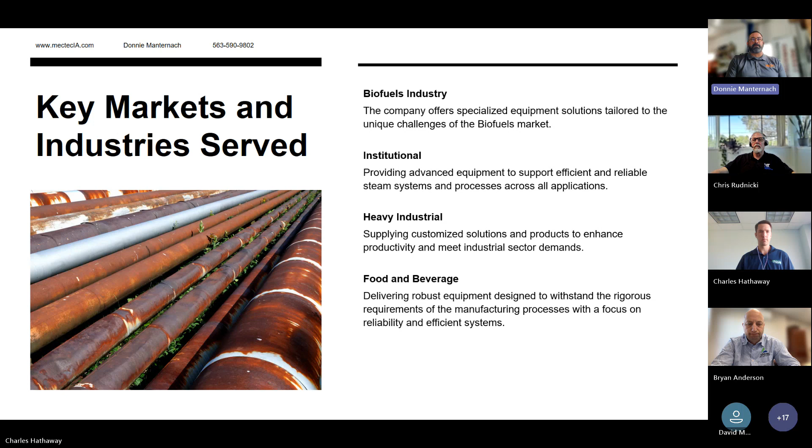I'll give you a quick overview of the product range that I offer with my customers, as well as some of the services. I service the biofuels industry, ethanol, biodiesel, institutional, which is hospitals and universities, heavy industrial, as well as the food and beverage industry, and have extensive experience in the processes related to those industries from the 15 years in the steam industry that I have.

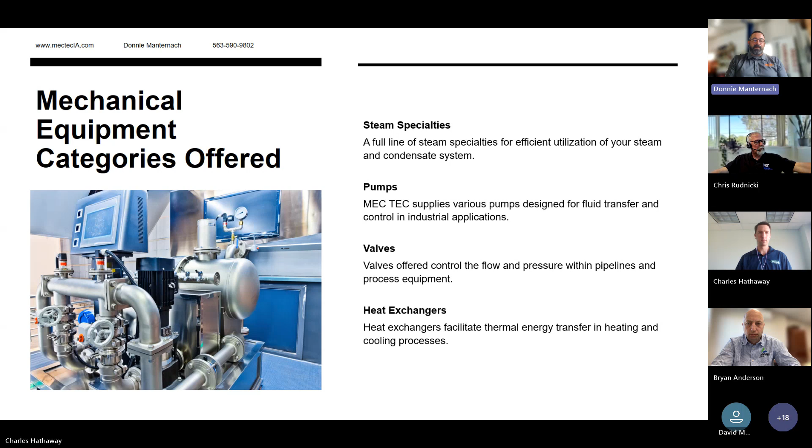The product and service capabilities as an organization: I offer engineered mechanical equipment ranging from steam specialties, which you'll hear very much about today, pumps from mechanical to positive displacement pumps, all ranges of valves from control valves, isolation valves, heat exchangers, as well as I do have an offering of steam trap services. So I can do steam system audits for your facility, steam trap surveys, as well as provide engineering and design support for any projects that you may have going on at your facility. And with the ultimate goal of providing your facility with a more robust, more reliable system that helps with your production and your processes moving forward.

And with that, I'll turn it over to Bryan, who's going to introduce us to Delta Steam Systems and the Venturi steam trap. Hey, thanks Donnie, very much. Excuse me, sorry.

Before we get started on that, can you talk about the best method for steam trap surveys and what goes into such a thing?

Over the last 15 years performing steam trap surveys, my preferred method is ultrasonic and temperature. The combination of those two results gives the best diagnosis of the current operation or condition of a steam trap in a system. Individually, one or the other gives you an indication, but it's hard to confirm true functionality of a steam trap without the combination of ultrasonic and temperature.

I know in the industry a lot of sites do try to do strictly thermal, and there can be some conflicts that arise from relying on just one technology or the other to truly deduce what the condition of a steam trap is.

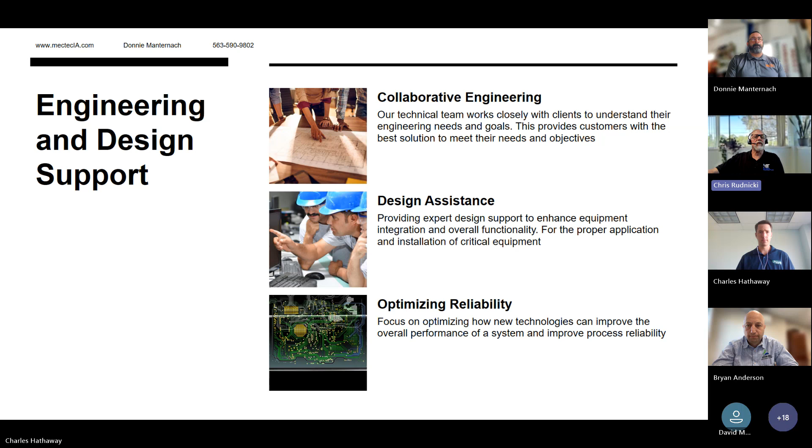Thank you, sorry Bryan. Yeah, no problem. Thanks very much. All right, let me get my presentation loaded up here.

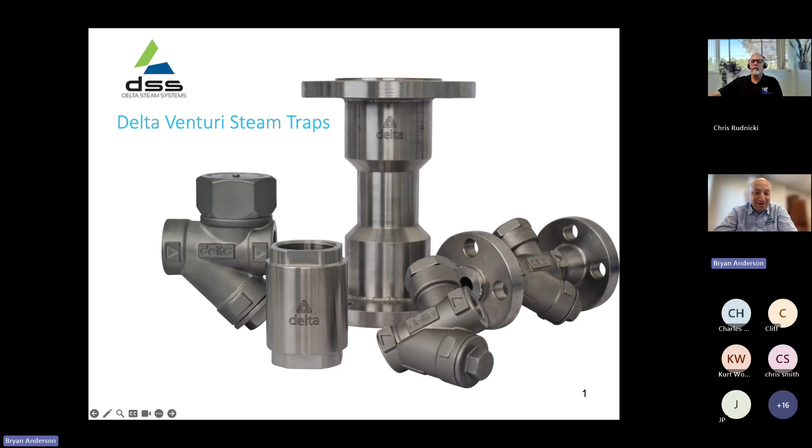So thanks everybody, nice to be here. It's 5 o'clock in South Africa. So let me just jump through our presentation a bit about who we are and what we do.

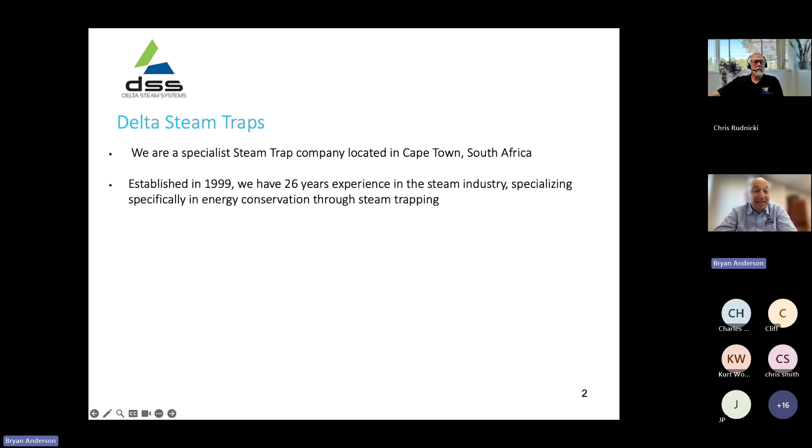We are steam specialists located in Cape Town, South Africa. We were established in 1999, so we've got 26 years in the steam industry, and we specialize in energy conservation through steam trapping. We're an ISO 9001:2015 company, and we're the designers and manufacturers of the 20-year guaranteed Delta Venturi steam trap.

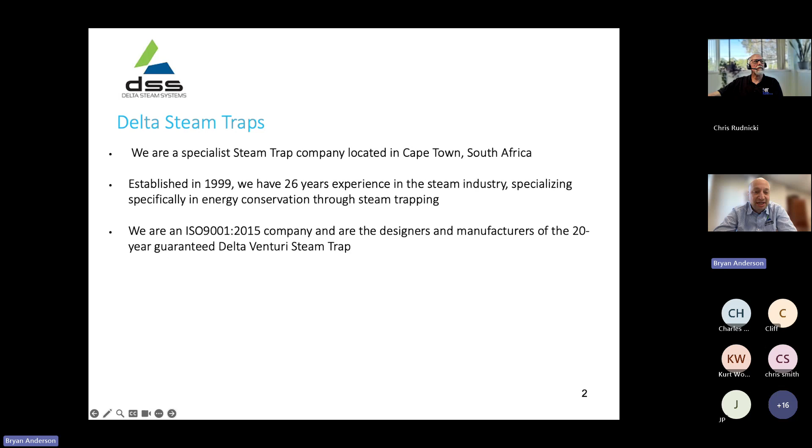Our head office is in Cape Town, South Africa, and our distribution network is spread across the world, with a sales network that extends even further. I'm going to briefly touch on some functions of steam traps and general steam trapping, and then jump into the Venturi steam traps themselves.

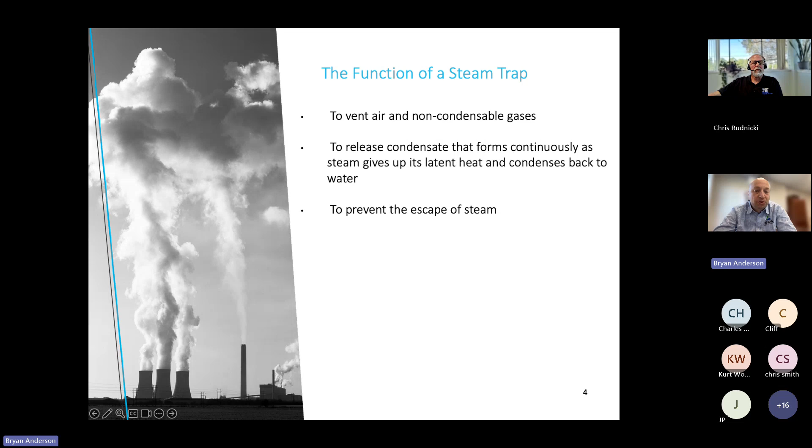The function of a steam trap is to vent air and non-condensable gases. It releases the condensate and gets rid of it as quickly as possible as it forms. Its job is to prevent the escape of steam, which is very important, and to operate reliably for long periods in harsh environments. Conventional steam traps open a valve when condensate or water is present, and close the valve when steam is present. The valve opens and closes continuously to drain the condensate and stop the steam from escaping.

In steam traps there are many moving parts such as ball floats, inverted buckets, bimetallic strips, bellows, and discs, and they cycle open and close continuously as they operate. As an example, a steam trap that cycles conservatively 5 times a minute is 300 times an hour, 7,200 times a day, and over 2.6 million times a year. This continuous cycling movement often results in steam trap failure, often within the first year.

Conventional steam traps are generally seen as consumables and need constant replacing, mainly through the cyclical movement of just wearing themselves out.

Steam trap failure happens in one of two ways: either fail closed, when the internal mechanisms are damaged, causing the steam trap to be partially or fully closed or blocked, or they fail open, where the mechanisms are damaged and the steam trap fails fully or partially open and leaks steam.

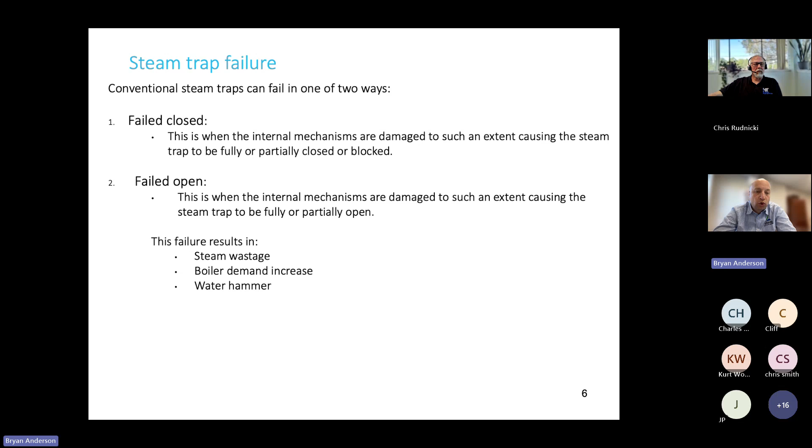Steam trap failure results in steam wastage, boiler demand increase, water hammer, cracked or damaged heat exchangers, valves, steam and condensate lines, additional boiler fuel usage, pressurization and slowing down of the condensate return system, poor heat transfer, decrease in production capacities, and carbonic corrosion resulting in leaking pipes.

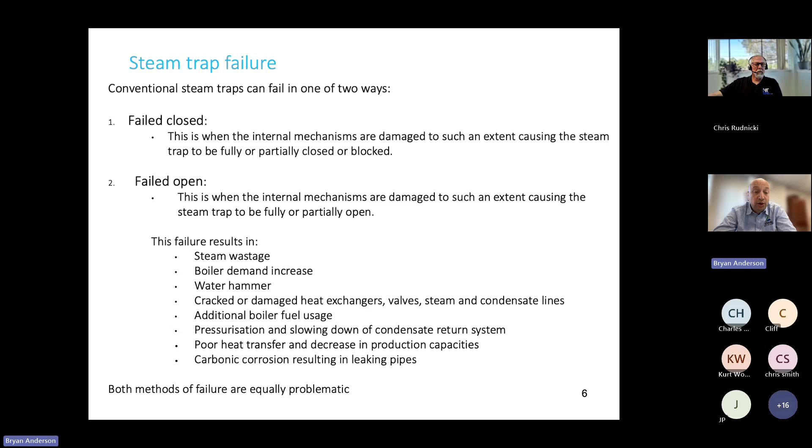Both methods of failure are equally problematic. A typical steam reticulation system is essentially a steam boiler with a main steam line to a steam header feeding the steam system. There'll be steam traps along the manifold, along the steam lines, getting to a heating unit or heat exchanger where the steam's been used, which will have a steam trap on it.

All of this condensate returns to the condensate return tank, which is pumped back to the boiler. Most plants are closed loop systems like this.

You do get drain to waste systems as well, but all along the system you'll have steam traps placed to get rid of that condensate and trap the steam back into the system and work efficiently.

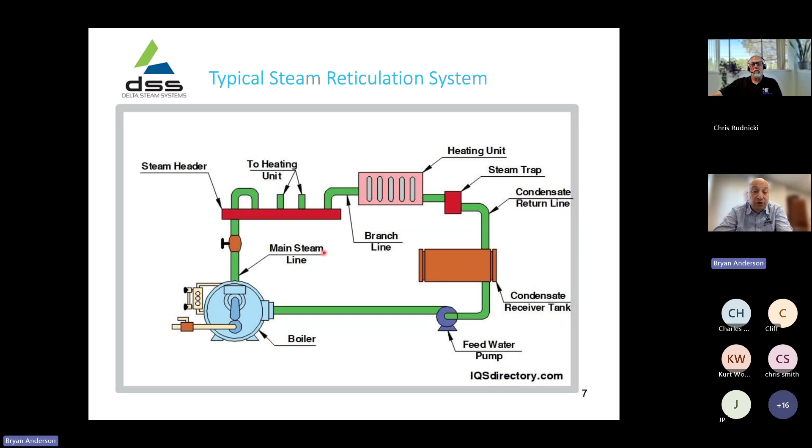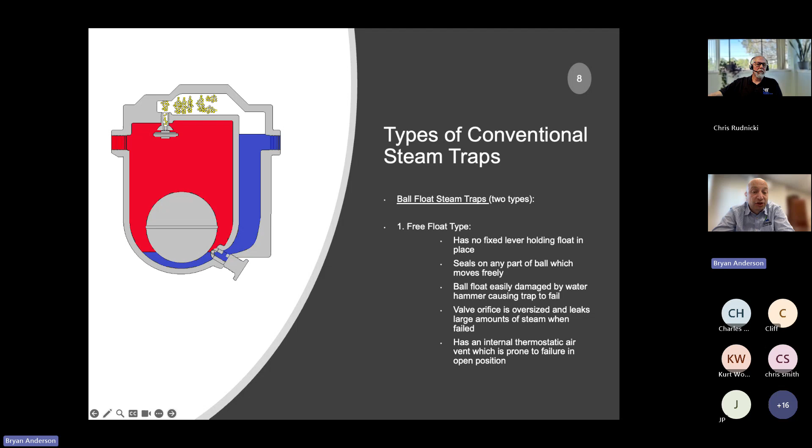So just quickly, some types of conventional steam traps. You get ball float steam traps. This is a free float steam trap where a ball moves up and down on a valve, which allows the condensate to leave. That valve is often oversized, so when the trap does leak, it leaks large amounts of steam.

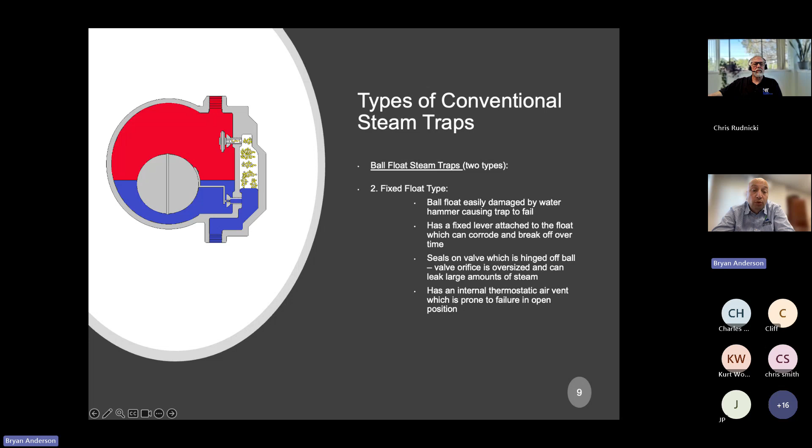You also get a ball float steam trap with a fixed arm that's fixed to the body of the trap, to the valve assembly, and that lifts and lets the condensate through. This also has an oversized orifice, so when it leaks, it leaks large amounts of steam. Generally these steam traps have built-in air vents, which can also leak steam.

The second type is inverted bucket type steam traps, which work on a system where there's a linkage with an arm, and that lifts and allows condensate to move. It's a part that moves up and down. This is the valve assembly, and as this bucket lifts up as the condensate fills it, that valve assembly will lift off the valve there and allow condensate to push through. This cycles open, close continuously.

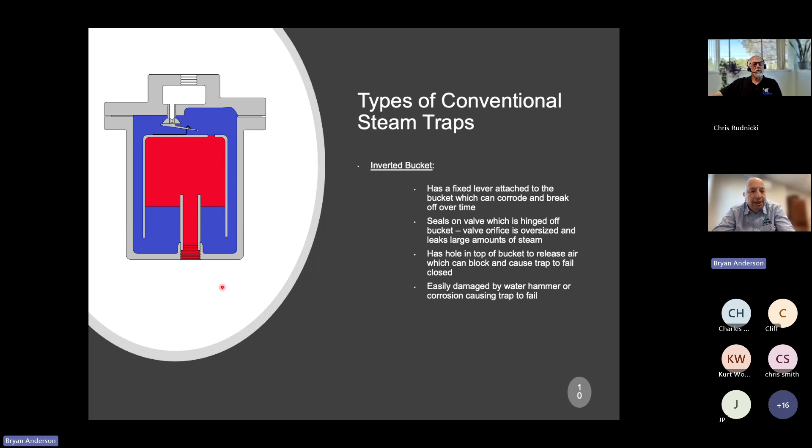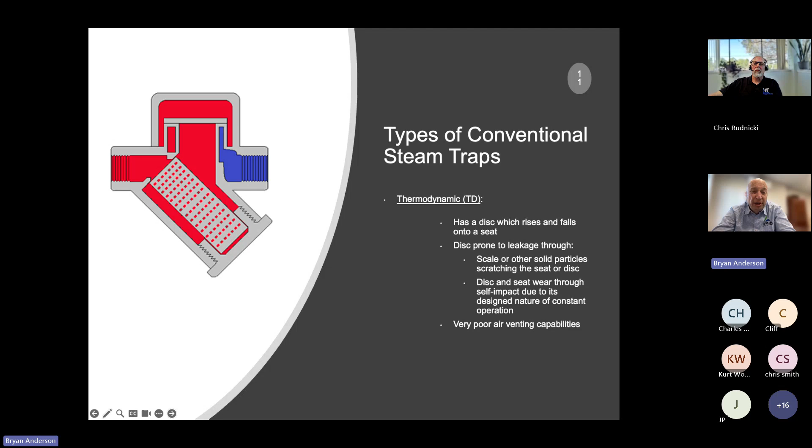Then the next one, probably the most common type of steam trap, is a thermodynamic steam trap, which operates with a disc that rises and falls on the seat. This disc is prone to leakage through either scale or solid particles scratching the seat or disc, or just through self-impact due to its design nature. As it opens and closes constantly, that self-impact creates wear and the traps tend to fail. Thermodynamic traps are probably the most common traps to fail on a steam reticulation system.

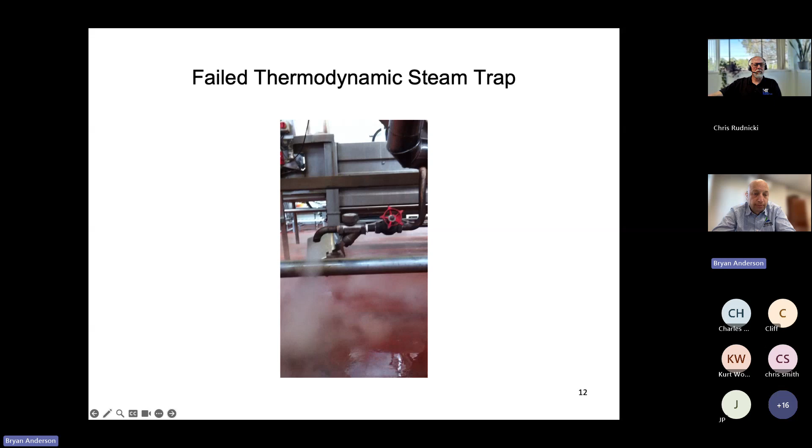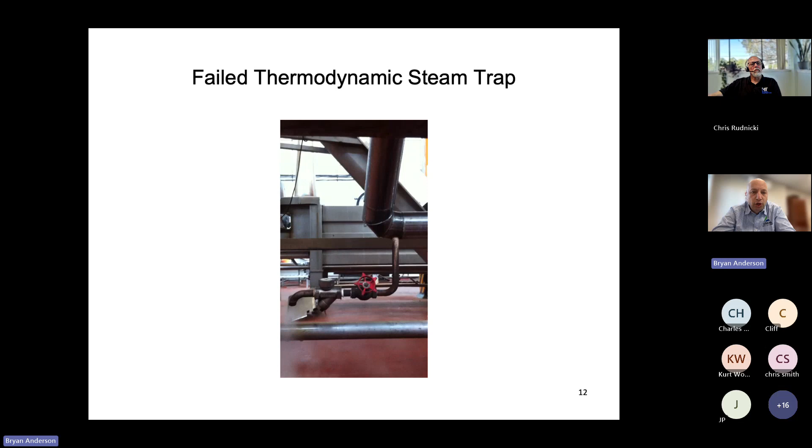So that trap is just wasting steam. It's supposed to close, wait for condensate to build up, and then pass the condensate, but this one's just passing steam constantly. We actually call it motorboating, the way it goes up and down, and that's normally piped back into your condensate return line, and it's not seen. So you don't see the waste, the leaking steam in front of you. It's piped back to your boiler system and often just vented out to atmosphere.

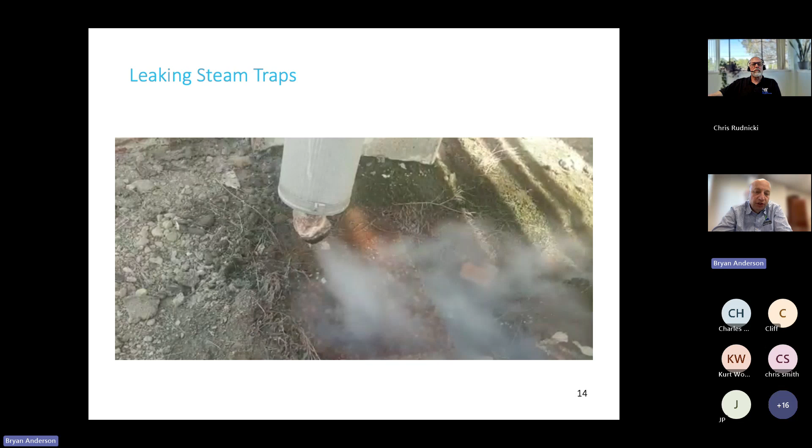And this is a video of a thermostatic steam trap on a condensate return system in a refinery that has failed. Again, that's just a visual that you can see. It's normally piped back to your return system, so you don't even notice that that's happening. You walk past the steam trap and it all looks good and you think the trap's working well, but meanwhile it's blowing steam back into the steam condensate return system, and it's costing loads of dollars.

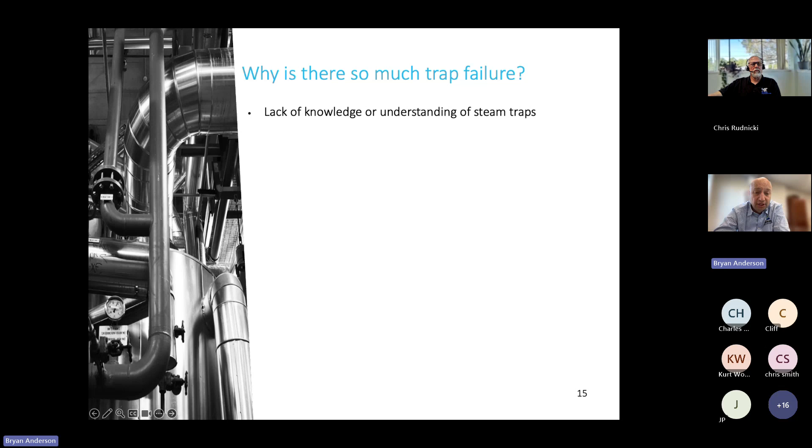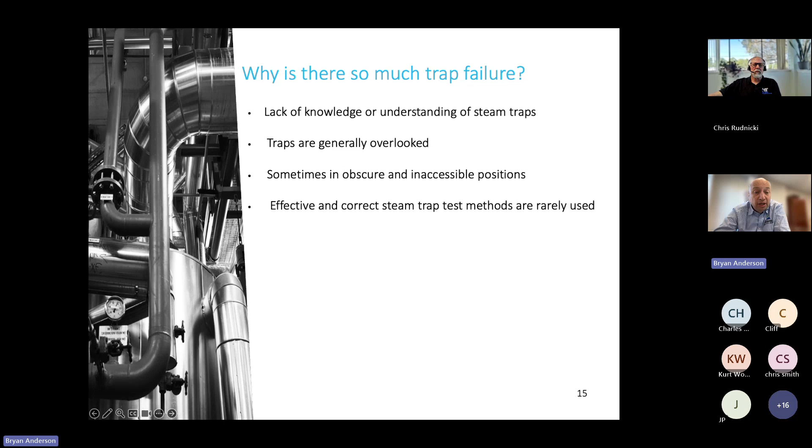Then why is there so much steam trap failure? Often there's a lack of knowledge or understanding of steam traps. It's just a valve that's in the system, and nobody really knows how to test it or what to do about it. They're often just generally overlooked. Sometimes they're in an obscure or inaccessible position, so they can't be reached to be tested properly. Or effective and correct steam trap test methods aren't used to test the trap properly.

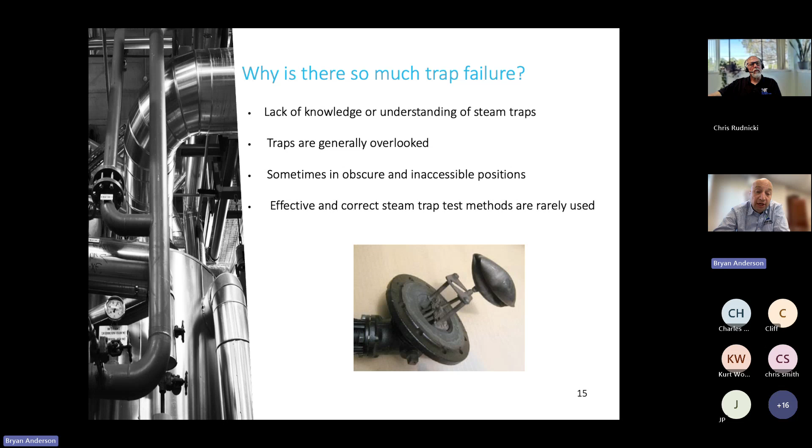This photo just shows a picture of an F&T trap, the ball that's used to modulate the valve assembly that's been damaged by water hammer. So when this happens, this valve would fail in the closed position, and that steam trap would not pass any condensate out. So it's easily damaged by water hammer and then fails closed.

So results of steam trap failure are process problems where there's frequent downtime, pressure surges, or slow startup, and distribution problems with steam loss, water hammer, or poor steam quality.

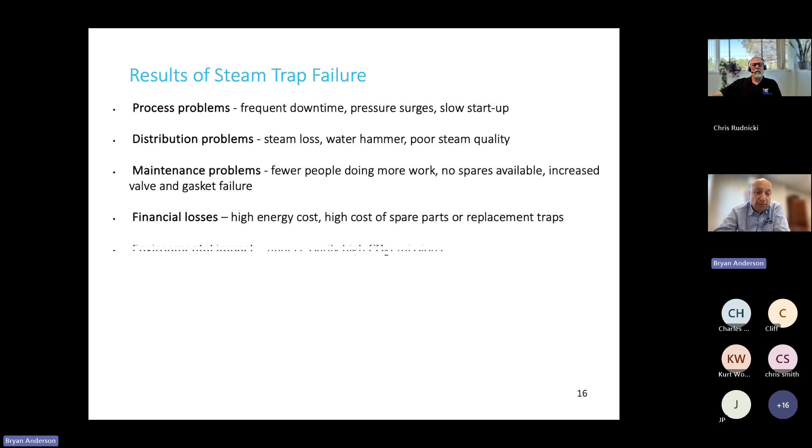There's maintenance problems where there's fewer people doing more work or there's no spare parts available. And then financial losses, there's a high energy cost, high cost of spare parts or replacement traps. The environmental impact where there's unnecessarily high CO2 emissions through failed steam traps.

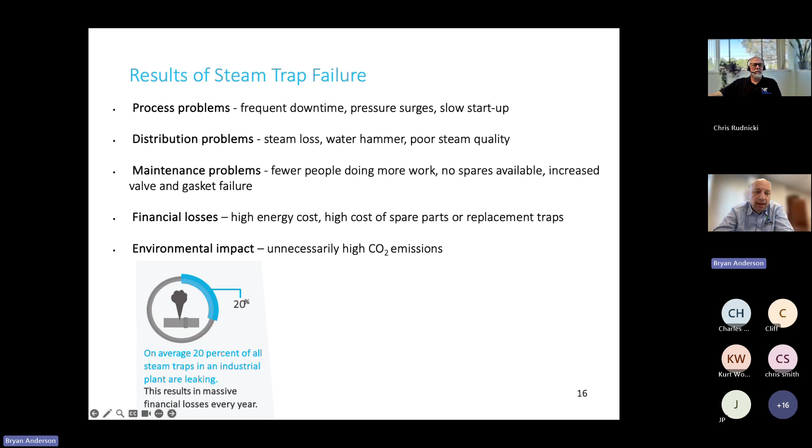On average, 20% of all steam traps in an industrial plant are leaking, which results in large financial losses every year. We've done numerous steam trap audits around the world, and that 20% is a figure we see quite regularly. We see less and more, so depending on the regularity of your steam trap testing program, you can bring that down a bit if you test your traps more often. But generally, it's 20% failure of the steam trap population on a plant.

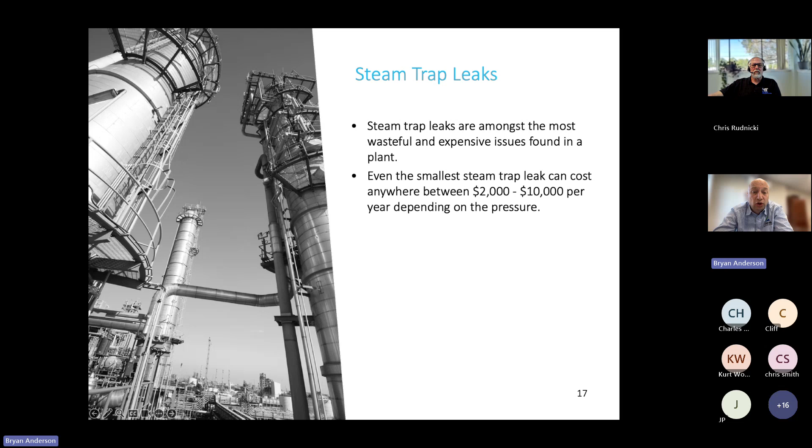So steam trap leaks are amongst the most wasteful and expensive issues found in a plant. Even the smallest steam trap leak can cost anywhere between $2,000 and $10,000 per year, depending on the pressure in the system.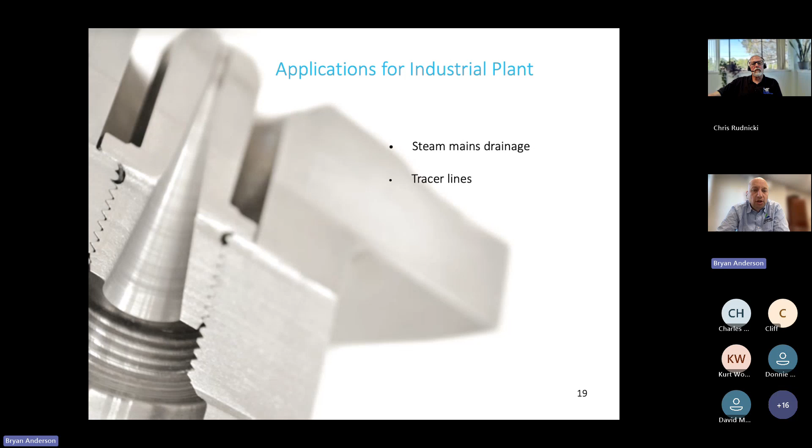And then just some applications for industrial plants, I think I just touched on it now. So steam mains drainage, drip legs, tracer line applications, and process applications, heat exchangers. That's what I was saying a bit earlier.

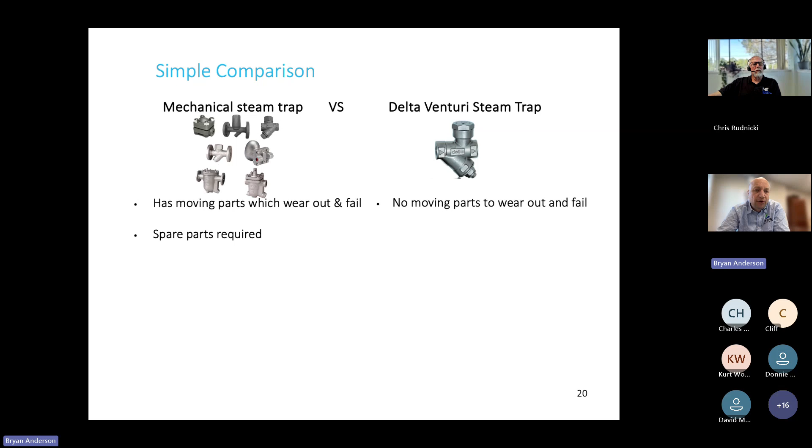So a simple comparison between conventional steam traps and Venturi steam traps. Conventional steam traps have moving parts which wear out. We touched on that earlier. Because of the way they cycle and constantly are opening and closing, they eventually fail and wear out. Whereas there's no moving parts on a Venturi trap that fails and wears out. They require spare parts, conventional traps, where Venturi traps don't require spare parts.

Conventional traps have poor resistance to wear and water hammer. A Venturi trap easily handles water hammer.

Conventional traps generally come with a 1-year guarantee or warranty. With the Venturi trap, it's 20 years.

Expected lifespan of a conventional trap is 1 to 3 years on average, some may last a bit longer. The expected lifespan of a Venturi trap is 20 to 30 years, so it'll outlive most of the pipework in that system.

Conventional traps can fail open and waste steam. With a Venturi trap, a correctly sized Venturi trap cannot fail open and waste steam.

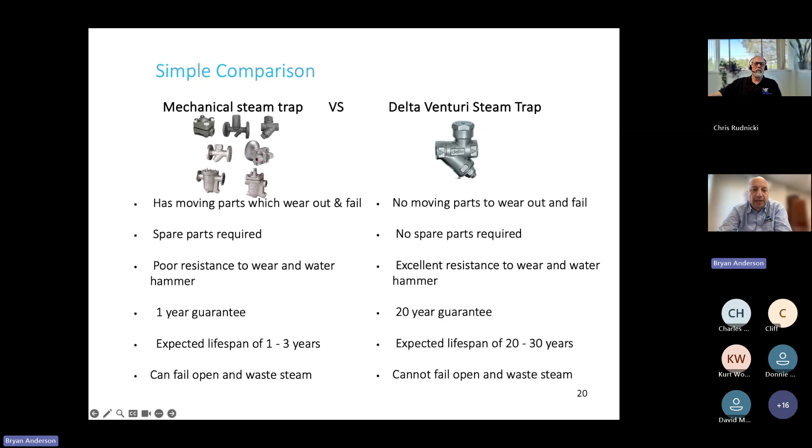The Delta DSV, which is the model I've been showing you, is the world's first dual strainer Venturi steam trap, with complete 316 investment casting construction.

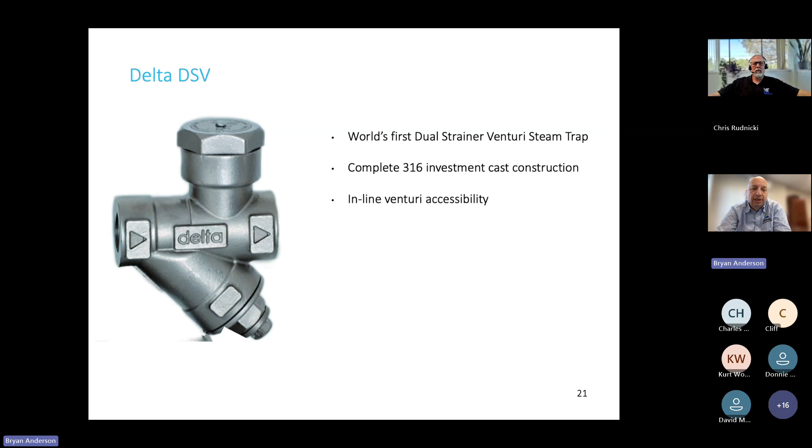It's got inline Venturi accessibility, so the trap itself is installed, and if you need to access the Venturi nozzle, if for whatever reason the system changes, the pressure is adjusted, and you want to change the nozzle, it's quite simple to do that. While it's inline, you don't have to remove it from the line.

Here's an exploded view of the trap itself. This is just the flanged version, but you can see the Venturi nozzle that gets fitted into the body of the trap, and over that goes the secondary strainer. From the bottom is the primary strainer with the caps and the gaskets that belong to it.

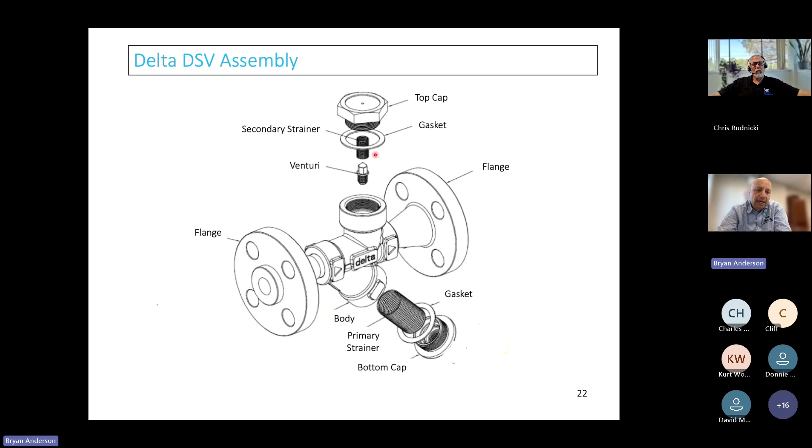So the flow through the trap: in the inlet through the primary strainer, through the inlet port, then the secondary strainer, and then into the tunnel orifice of the Venturi.

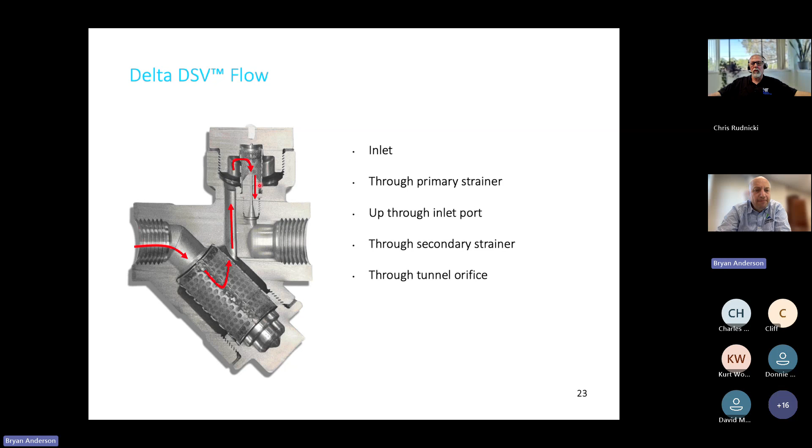Now the tunnel orifice is the elongated orifice of the Venturi trap, and why that's very important is that it's quite long to prevent wire draw. If it was a very short orifice, there would be a potential of wire draw and widening, but because we make it so long, we have no issue with wire draw. The orifice doesn't widen, and that helps give the extended warranty on these traps.

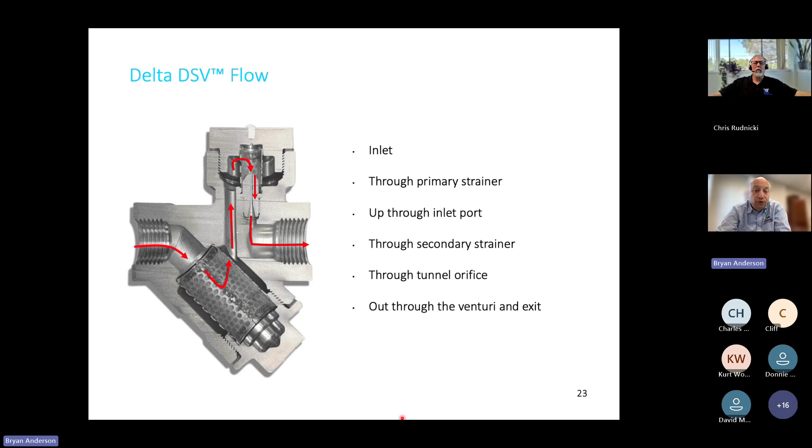And then obviously out through the Venturi and exits into the condensate return system.

I'm going to show you a quick video of the workings of the trap, and it'll give a bit of an explanation.

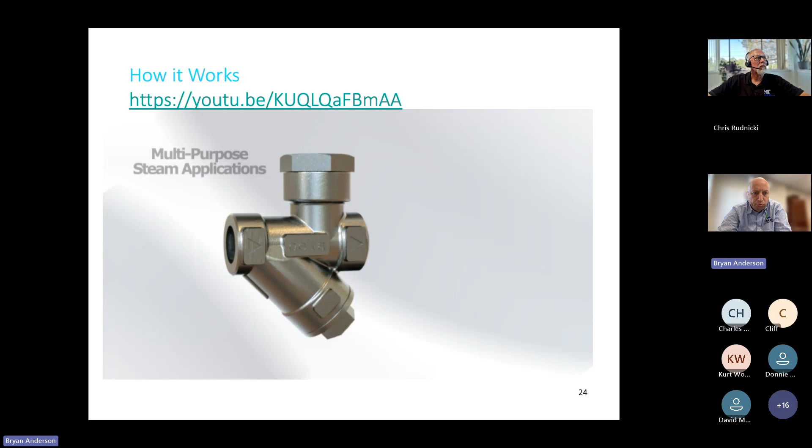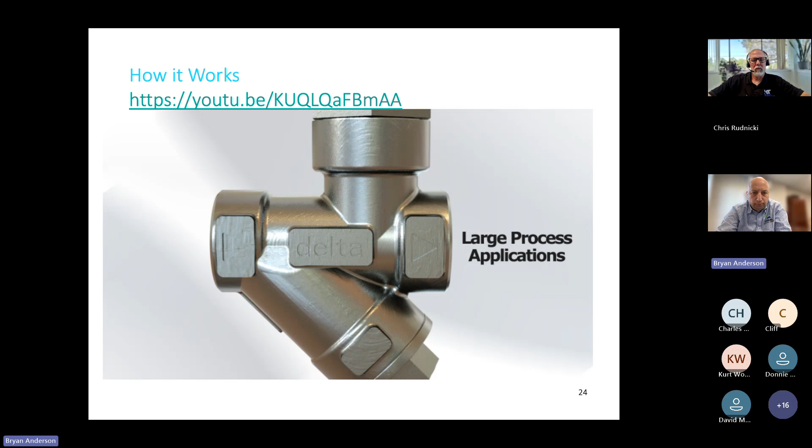Introducing the Delta Venturi Orifice Steam Trap, a unique steam trapping solution designed for multi-purpose steam trapping applications, from line drainage and trace heating through to medium and large process applications. Unlike conventional mechanical-type steam traps, Delta Venturi Orifice steam traps have no moving parts that can break or get damaged, and are still able to outperform conventional steam traps in lifespan and energy efficiency. The Delta range of steam traps have a lifespan in excess of 20 to 30 years, far outperforming any mechanical steam trap by many years.

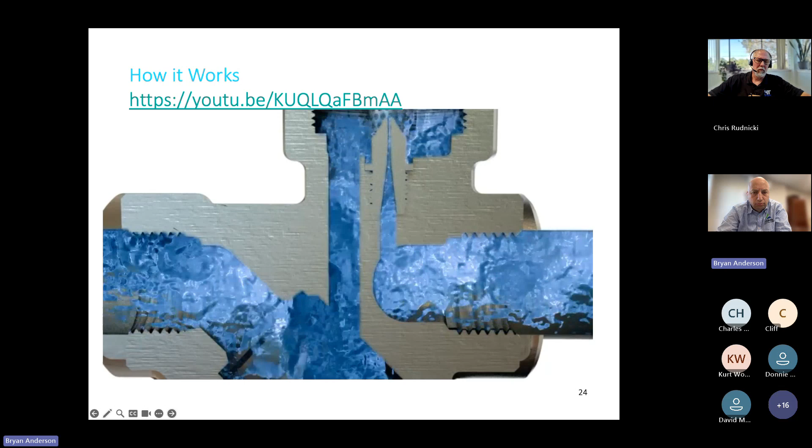At startup, the water is at very low pressure and temperature, so no flashing occurs as it exits the Venturi. This means there is no back pressure present to restrict the flow of cold condensate as it exits the Delta trap. This cold water exits freely at 2 to 3 times faster than hot pressurized condensate can at running load. This absence of flash steam on startup is why Delta Venturi orifice steam traps are suitable for startup loads.

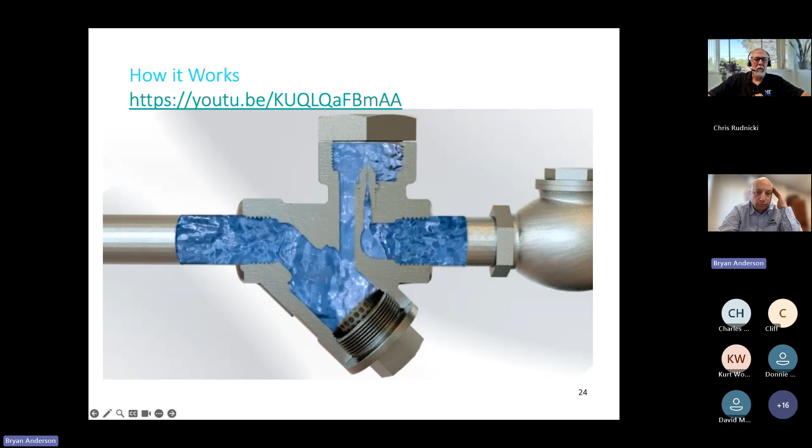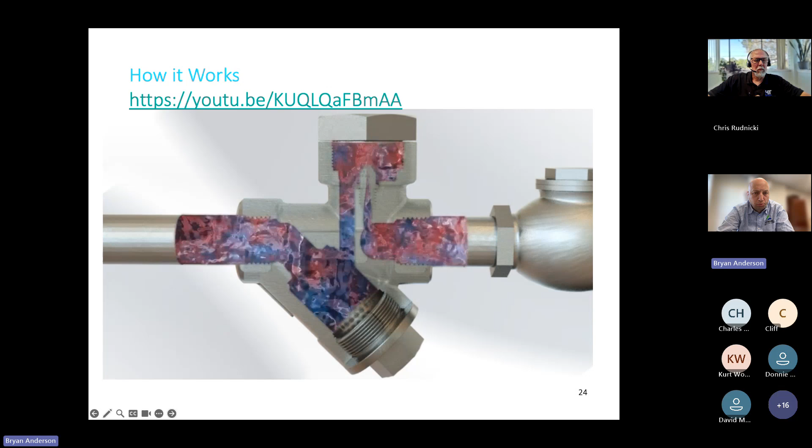Once all the cold condensate and non-condensable gases have been ejected, steam and hot condensate reach the Delta steam trap. As the steam continuously condenses to hot condensate in the pressurized steam system, it is fed to the steam trap by the pressure in the system. This hot condensate passes through the orifice and enters the mouth of the Venturi.

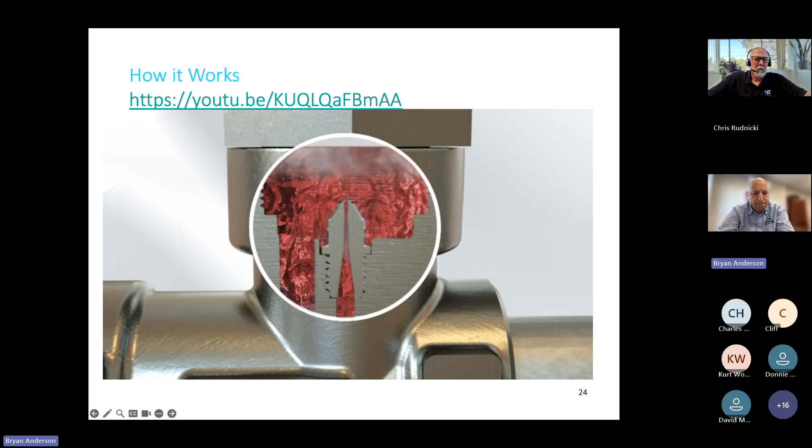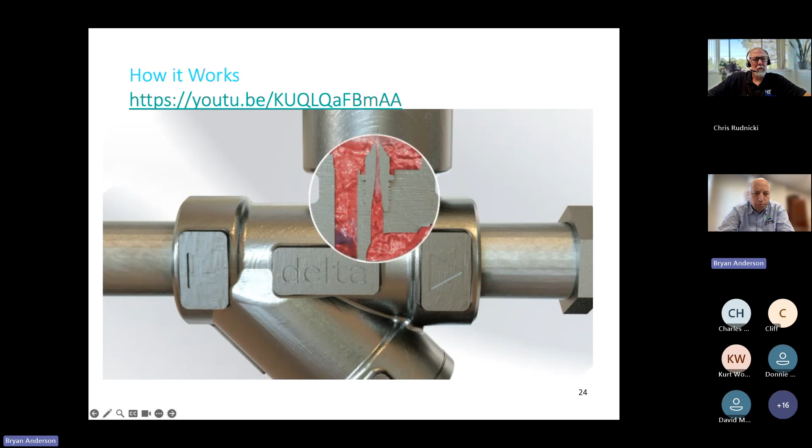As the condensate passes through the mouth of the Venturi, there is a sudden pressure drop, which causes a percentage of the hot condensate to change phase from condensate to steam, a phenomenon known as flashing. This flashing creates a back pressure zone in the mouth of the Venturi. Because condensate is 1,000 times denser than steam, it is able to push through this back pressure zone while restricting the steam. As the pressure and load in the steam system vary, so too does the percentage of flash steam being created at the mouth of the Venturi in the Delta steam trap, which in turn allows the back pressure at the Venturi to vary accordingly.

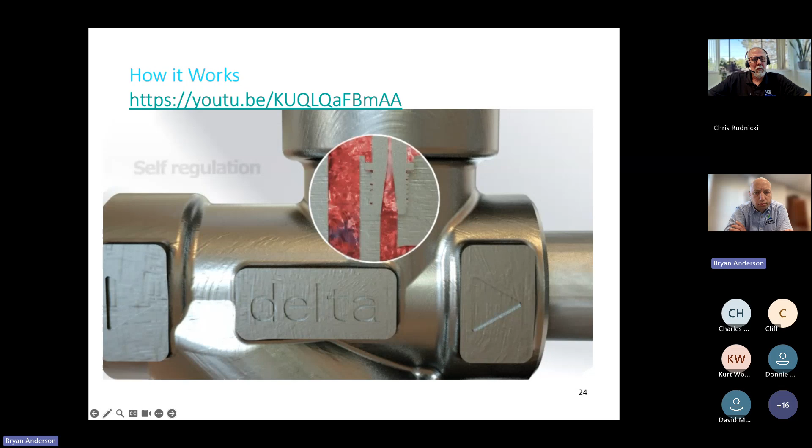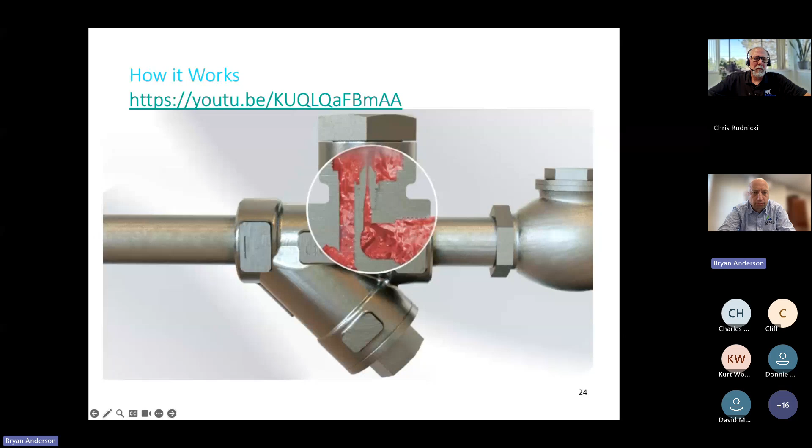This varying of back pressure at the mouth of the Venturi allows the Delta steam trap to self-regulate the condensate flow as the condensate load changes. As the pressure or load in the steam system rises or falls, the back pressure that is constantly changing at the mouth of the Venturi also rises or falls. This action gives the Delta Venturi orifice steam trap the ability to easily manage discharging varying condensate loads in a steam trap that has no moving parts, while still keeping the steam in the system.

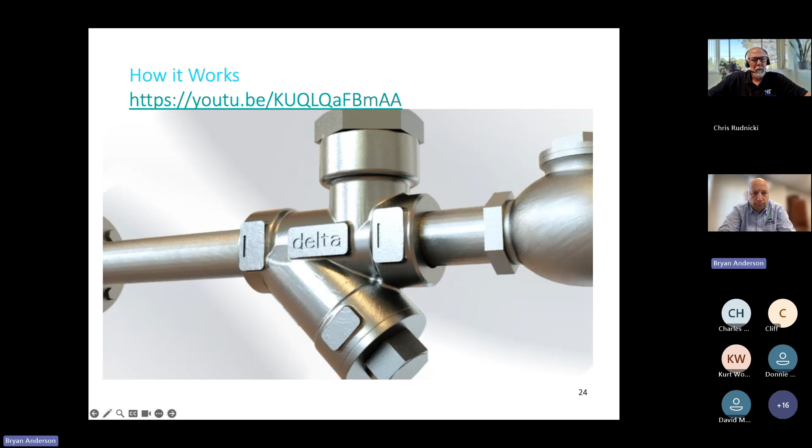In summary, Delta Venturi orifice steam traps are designed to outperform all conventional steam traps through their unique Venturi design with no moving parts at all. Once installed, the Delta Venturi orifice steam trap will outlast and outperform any other mechanical steam trap in the same application.

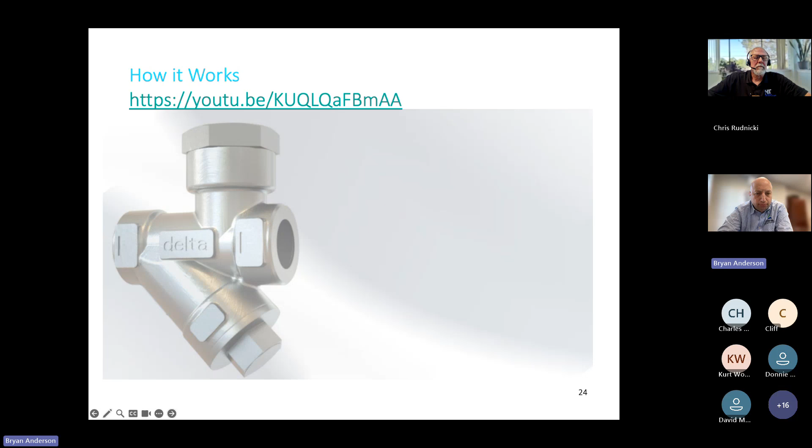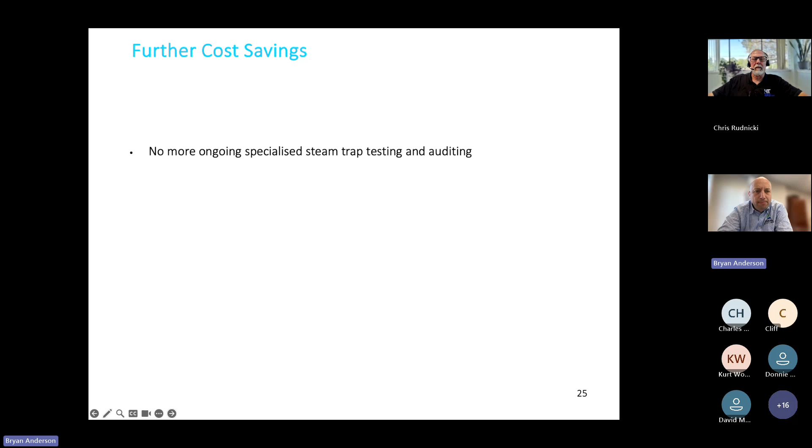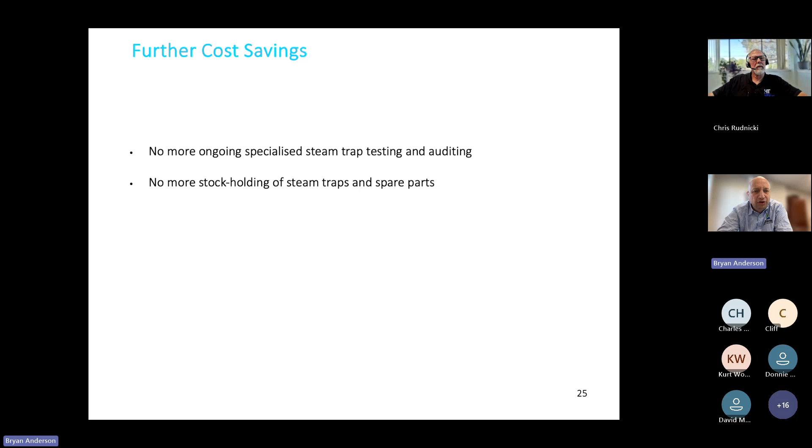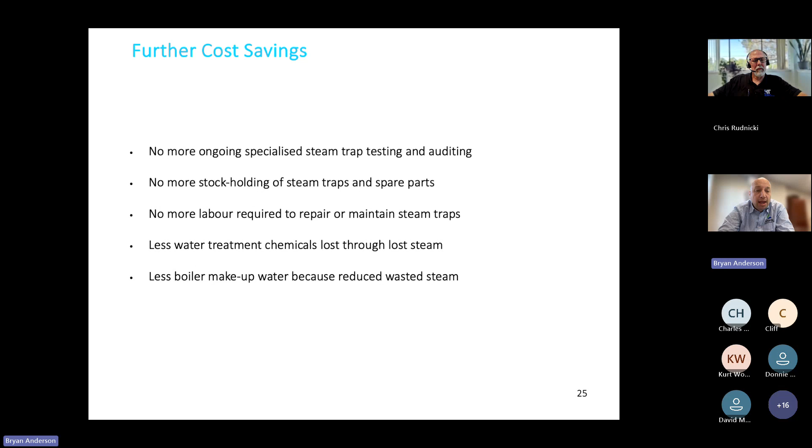So just touching on some further cost savings. Once you've installed Venturi steam traps and they're tested, commissioned, and working properly, there's no more ongoing specialized steam trap testing and auditing needed. It's because the trap is working and we guarantee it for as long as we do. You should never need to do any excessive steam trap testing and auditing. There's no more stock holding of steam traps and spare parts because you're not constantly replacing traps anymore. The labor is reduced for repairing or maintaining those steam traps. Less water treatment chemicals are lost through the savings on lost steam, and less boiler makeup water is needed because of the reduced wasted steam.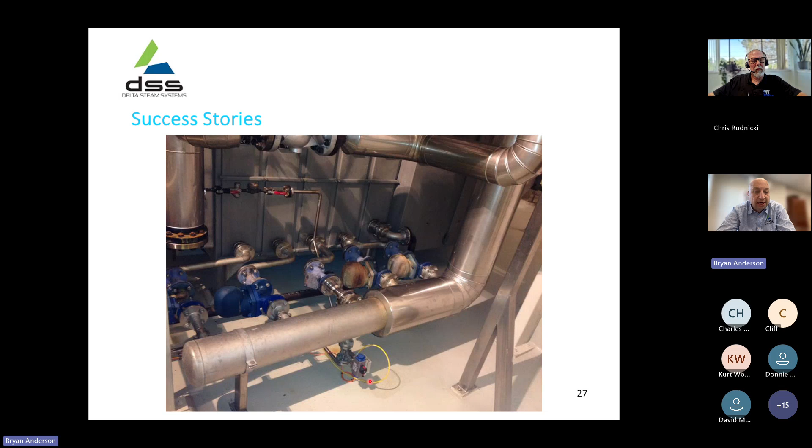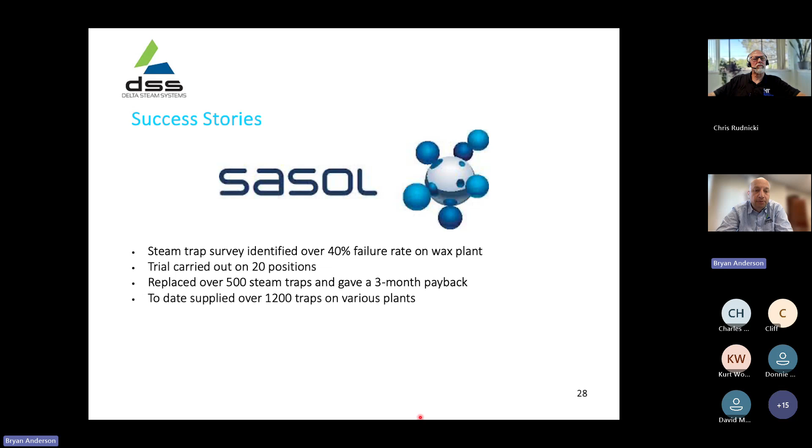And then another story was Sasol, which is a very large multinational petrochemical plant. A steam trap survey identified 40% failure across the total wax plant. They did a trial of about 20 traps, 20 positions, and replaced over 500 steam traps with a 3-month payback for that specific plant. To date, we've supplied over 1,200 traps across various Sasol plants around the country.

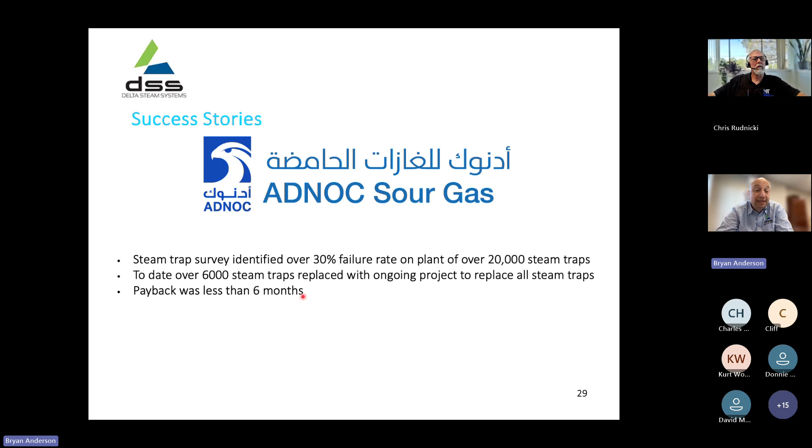And then ADNOC Sour Gas - ADNOC is the largest gas producer in the world, located in Abu Dhabi. They had a 30% failure rate on their plant of over 20,000 steam traps, so that's a massive failure rate. We weren't involved in the survey, we just saw the results and this is what was given to us. To date, we've supplied over 6,000 steam traps with an ongoing project to replace their steam traps. We've just received 2 orders from them for another 1,200 steam traps, so this is an ongoing project to replace all their plant steam traps with Venturi steam traps. The payback of the traps supplied to date was less than 6 months.

And then Bryan? Yeah, Chris, can you talk about the ROI and what is that typical 3 to 6 month payback? Yeah, so on failed steam traps, generally the ROI is less than a year, depending on the pressure and the steam costs, but often we do see returns of less than 3 months.

If it's on just the failed traps, it's generally 3 to 6 months, but sometimes just over 6 months. If it's on complete plants, where you take all the failed traps plus some of the working traps, you tend to get a return of about 1 to 2 years. They do that to eliminate the need to continuously replace traps, so they replace the whole plant. 3 to 6 months is what we see most often, but it can get up to a year, and then on complete plants, 1 to 2 years.

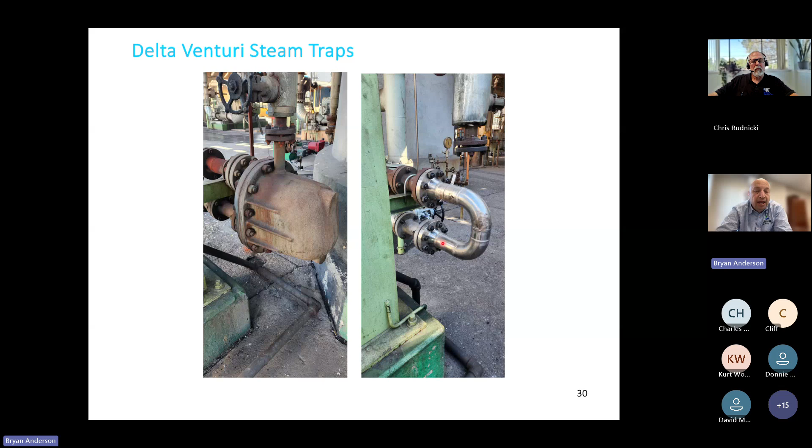Just some photographs of some traps that were replaced. These are large process traps. This was a very large, I think a TLV float trap on a very large heating column. We replaced that and made a special design modification for their pipework so it would fit. The Venturi nozzle itself is inside this body, and this was done on a very large petrochemical plant. There's a couple of traps that were replaced.

These are just from different sites around the world. Some thermodynamic steam traps that were replaced. This is a video of one of our traps working on a plant. Let me just get this set up, there we go.

What we're trying to show here is, it's often said Venturi traps just leak steam because they're just an orifice and can't hold condensate back. What can be seen clearly here is on the outlet of this pipe, which is vented to atmosphere, you'll see drips of condensate and just flash steam escaping. Now, flash steam isn't leaking steam, it's normal, it's just the steam coming off the hot condensate as it goes from a higher to a lower pressure. If it was leaking steam, you'd see pressure behind it, blowing down into the ground. So this trap is working very well.

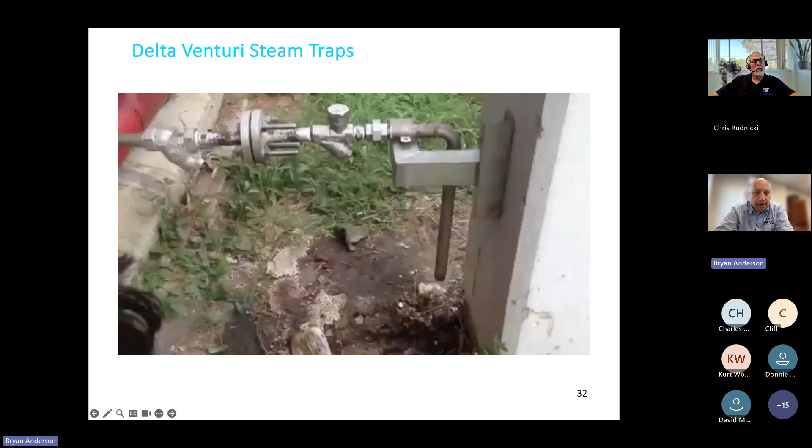I think this site was on a plant in Thailand. And that's just another thermodynamic steam trap that was swapped out on a petrochemical plant.

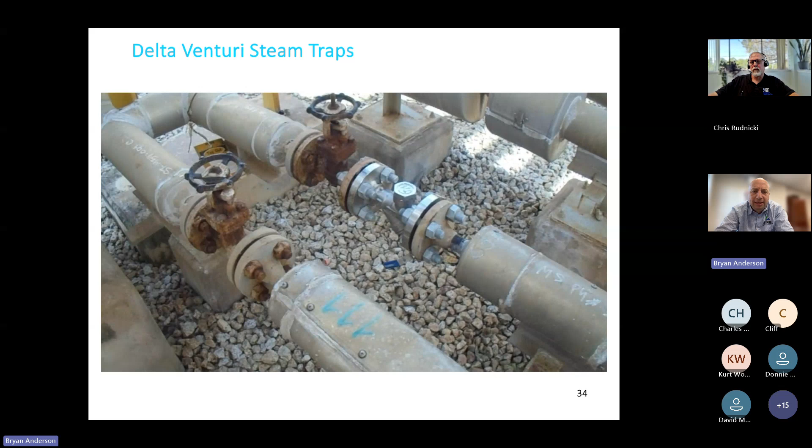And again, a video on a petrochemical plant of a Delta trap working to atmosphere, so you can see how it releases the condensate. What you're seeing here again is there's no huge amount of steam coming through the trap, it's just a little bit of flash steam from the hot condensate coming in.

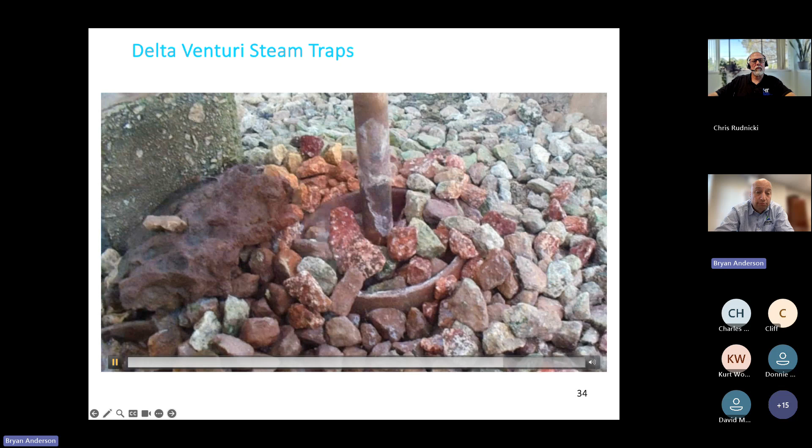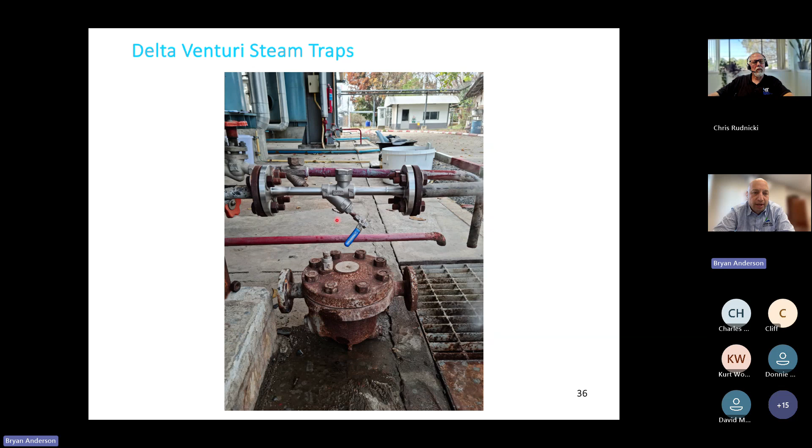A large number of traps fitted on a heat exchanger with different stages. Something we see quite a lot, because of the way conventional steam traps work, is you often need to put quite a large steam trap. This is a float type steam trap, an F&T trap, with a big chamber where the condensate fills and lifts the float, allowing the condensate out. We replaced this - I think it was a 1.5 inch trap - with a 3/4 inch trap in its place, and that's been running for a number of years now.

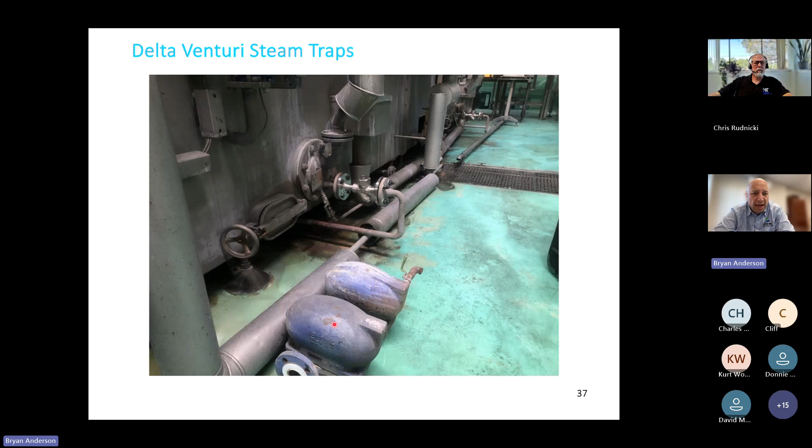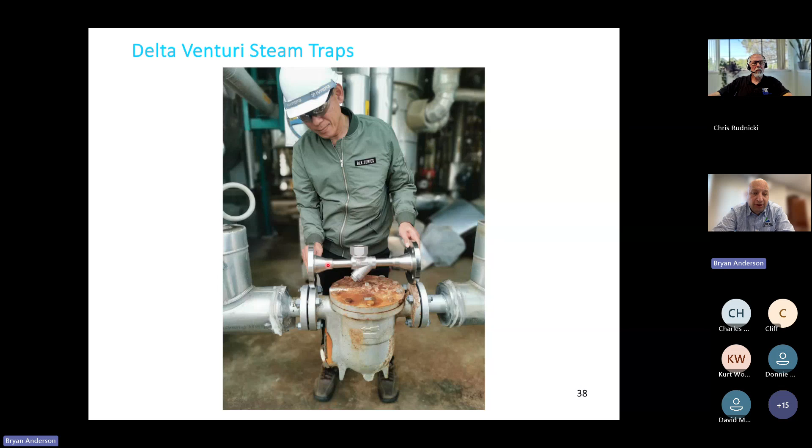There's a couple more of those examples. These were F&T traps, I think 1.5 inch or 2 inch, again replaced with a 1 inch trap. Then this was a big chemical plant in Thailand, where this F&T trap was replaced by a 1 inch trap. You see, they just flanged up the piping to allow the trap to work, so we can get away with a lot smaller traps. There's the trap once it had been installed.

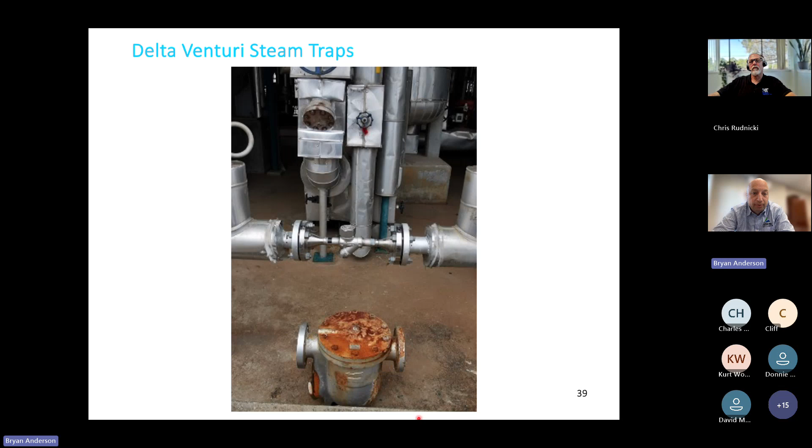That's been in for over 5 years and running successfully. I was back at the plant earlier this year, we checked it, tested it, and it's working beautifully. So that's my story - that's Venturi steam traps.

And I guess another question, this might be more for Donnie, when it comes to surveys, that's where we would determine and help customers size their traps, correct?

Yeah, absolutely. That'd be part of the process of a survey or an audit for their steam system. At that point, we would gather that information from the site, do our pipe measurement lengths so that we can properly select the right Venturi orifice for the trap that's going to go on that application, whether that be a drip leg. Obviously, pipe lengths between drip legs make a difference.

And as Bryan mentioned, insulated or uninsulated, whether it's inside a facility or outside a facility, all has a direct impact on the amount of condensate that's formed from radiant heat losses. And then obviously detailed information when we're applying them on a process related trap, such as a heat exchanger or stripper column or something like that.

Thank you. I'll leave the chat open for a minute here if there's anything else anybody wants to ask.

And if I could just add, Bryan talked about it early in his presentation, one of the unique features of the Delta line is the removable Venturi. Other people in this industry that provide orifice style traps typically have permanent orifices. So if they do misselect, or a process condition changes, the Delta Steam line has the option of being able to just swap out the Venturi orifice while it's still in line, for a very quick change and adjustment to match the new application or the new situation in the steam system.